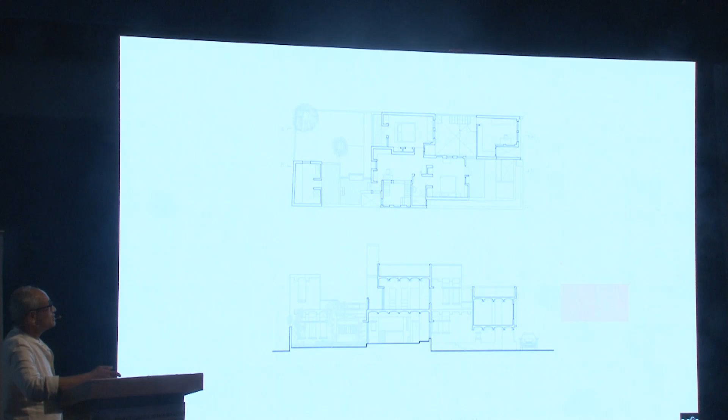The first house that we did was for my mother-in-law, which was on a 30 feet by 80 feet plot. So the garden is at the back. It was built in 1995. Fairly simple plan, you will see it has precast beam systems, precast panels, all that. It is something which has grown on us, and I think it has also become a kind of anchor point when I look back at work that I do, I feel that I lost my way in between.

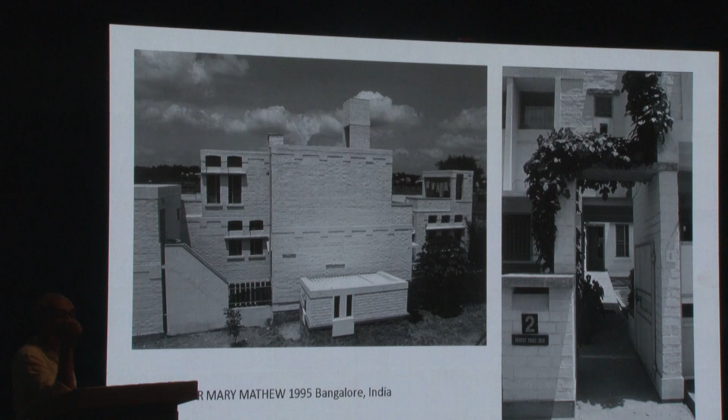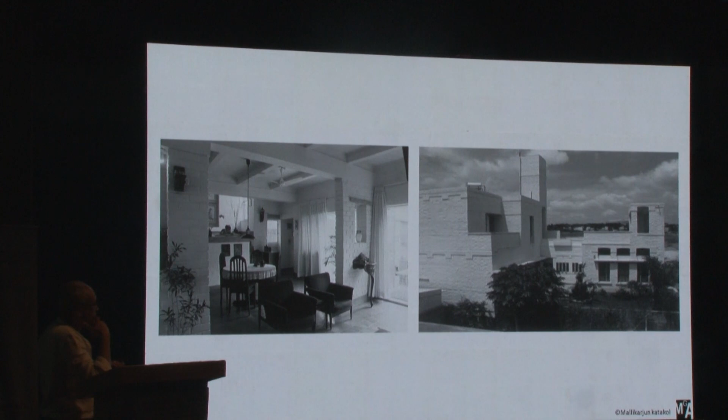There are projects where I think I had to turn back, and I realized that because there is something in some projects which is not just nostalgia. It is something deeper that is there. And that's the garden today where we normally dine. It's a little garden at the back. And that's all it is.

And makes a home. This is 2017, it's called the House of Stories. It belongs to a writer who, after an hour of meeting, says, I'm an architect from SPA Delhi and I want you to design my house. She could have said that when she entered the door. I was wondering, because the first thing she said was, I want a house of darkness.

So I said, I have lived in North India, so in my mind I said, Vichitra Prani, you know. I said, what a strange thing. And the first thing she handed over was Tadao Ando's book, I Love Concrete.

This, of course, Nisha has designed. I didn't clear this exam. We both made two independent schemes on the same idea of House of Darkness, and I think this was much closer. I'm glad I lost on that, but I got it done and finished.

It's about you entering somewhere where you don't know where you're actually headed, so there is a certain amount of uncertainty as you enter a door, and this is where architects also play the fool. The door is designed like a guillotine, literally cut in that shape, so when you open it, you feel it's going to chop your head off. But you don't tell the client such things — those gory stories and fun you keep to yourself.

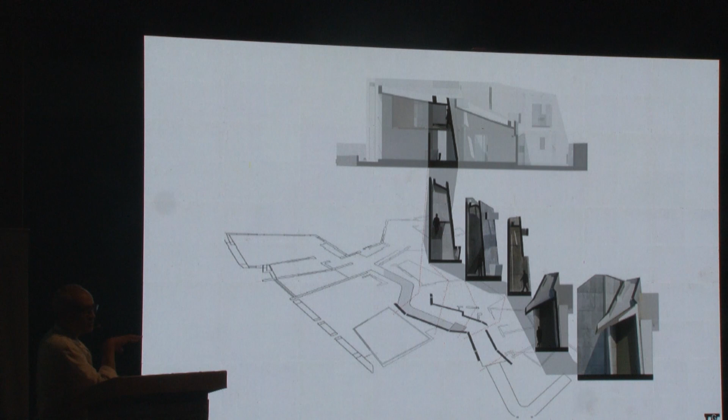So it's a bizarre plan, but that space never actually feels that way. You'd think you'll go crazy looking at it, or that it's a play of forms or volumes. No, it's not — it's got a very simple strategy.

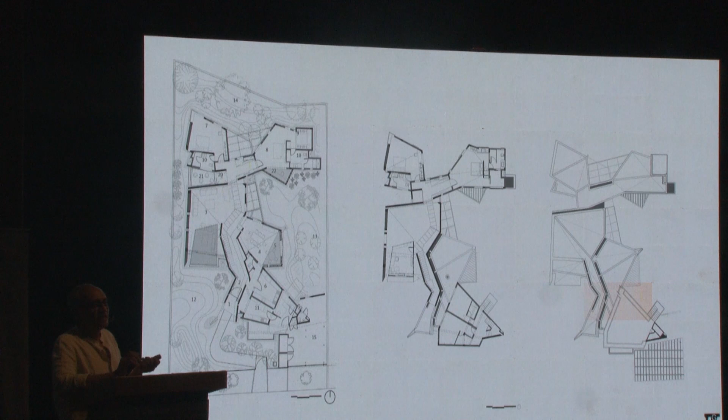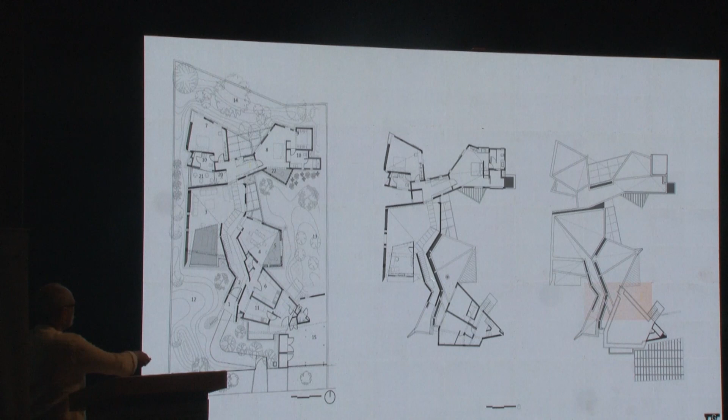It has three different gardens, and it's only looking at inflections as you move. You move through the center, which is the core — sorry, it's not very visible. That's the concrete, and there are skylights which happen, and that's what collects the water from the roof. The roof is not straight, everything is sloping. Most difficult house to execute.

But architects have been known to use the axe on their own foot.

This is one of the gardens which was used by her mother, so she would spend a lot of time here. On the left is the breakfast room, that's the pavilion kind of space. Nobody believes it when other people come into this space, because the house actually is like this — there's nothing more and nothing less than what you see.

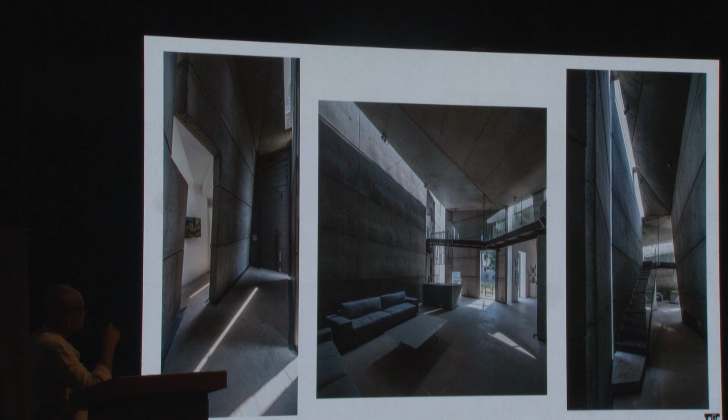That's the level of simplicity and the idea of luxury that they have. The luxury is about simplicity of material, it's about space, it's about shade, and how light transforms what happens on the wall — it literally gets animated, like Kuke was showing in his project. I often get pictures from them, and it's as frugal as maybe just a flower vase, otherwise there's nothing.

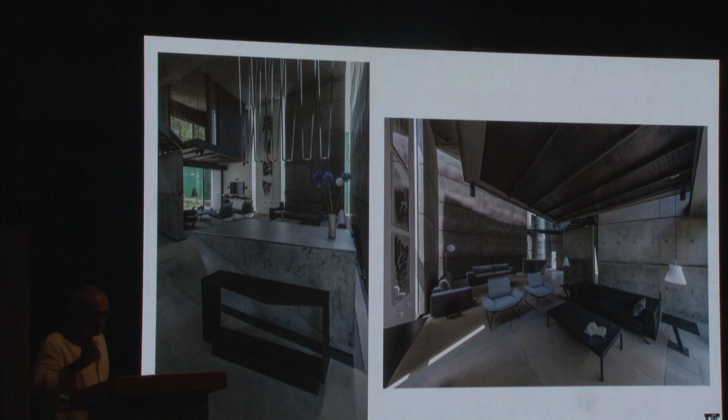Yeah, the most intensely detailed project that I've ever done. Everything, including the bench, the light which got the Elle Decor award, and the skirting — there's no end to this.

But this house breathes, and the concrete does two things. In the daytime, it becomes shelter. In the nighttime, it really feels like a dense cave because it absorbs all the light you're using — it doesn't pick light. And then you have these little log cabin kind of things.

It's literally just about light — that's the skylight on the left, these are the cutout skylights, and little things. I think these little things matter a lot.

That was for the granddaughter, because when she comes, she has a thing by the window. The lady became a writer, so she sits here and does her writing — she writes English fiction, so she has a view of the entire garden. That's her son's room, and that's the granddaughter's little space.

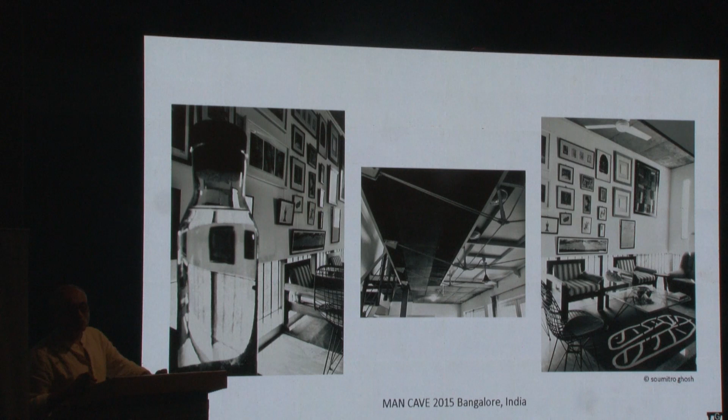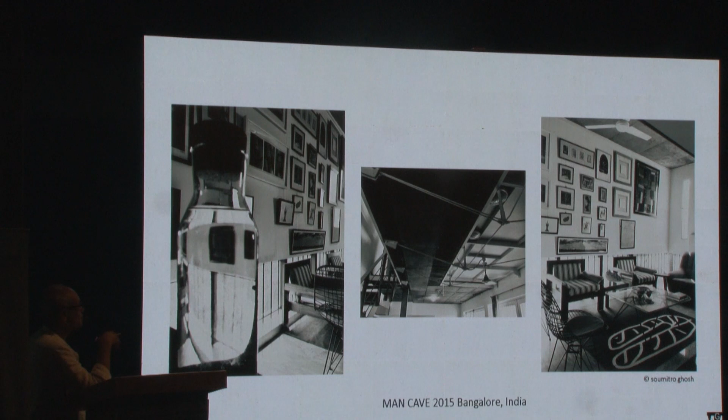That's my cave, actually — I closed off a bit of my home. This is below my office, so I closed this double height space and made a little plywood kind of thing. I discovered my home only during COVID, because otherwise I was in the studio till 9 or 10 o'clock. Once nobody was coming in, I wasn't even going to the studio, which was one floor up — I'd rather spend time here. It's just a place for books, that's all it is.

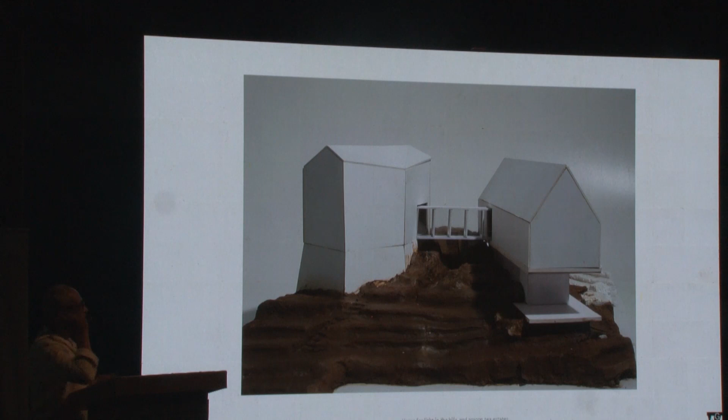So two blocks: living space, bedroom space, and a link, and a space in the heart of the house. So this is what it became.

It's only when I reflect back — and this is something I have also realized — that a lot of the decisions happen, but their real reason I myself only realize at a later point of time. Whether it be the plan, it's very much like what the villagers and even the British were doing in Coonoor. There's no difference.

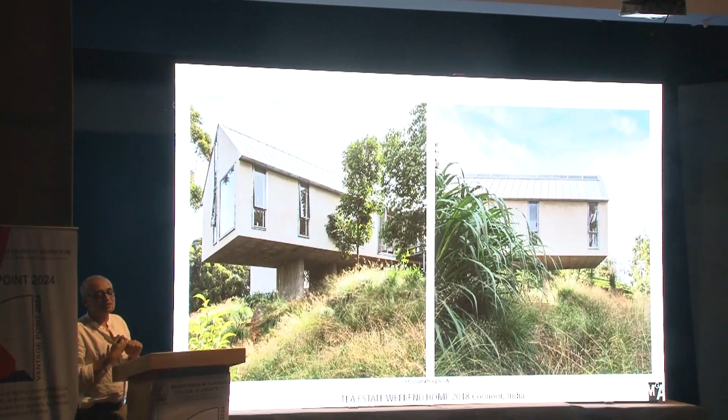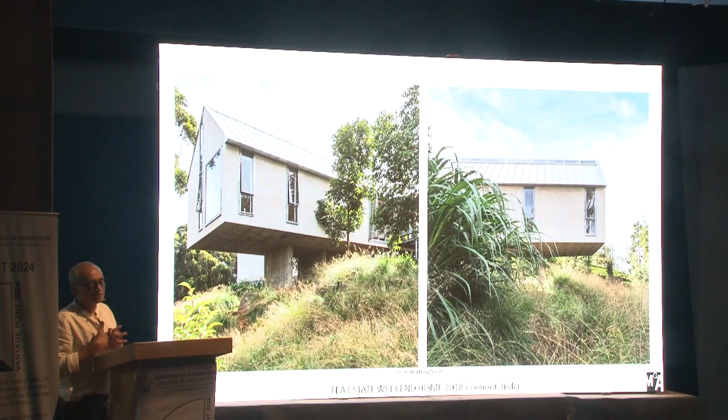So typologically it is similar. Then what does it do about the structure? It has shades of South American modernism, which is the stilts and the concrete. There is the lime plaster, which is for purposes of weather and for having buildings age gracefully, so that you never paint. Let it age.

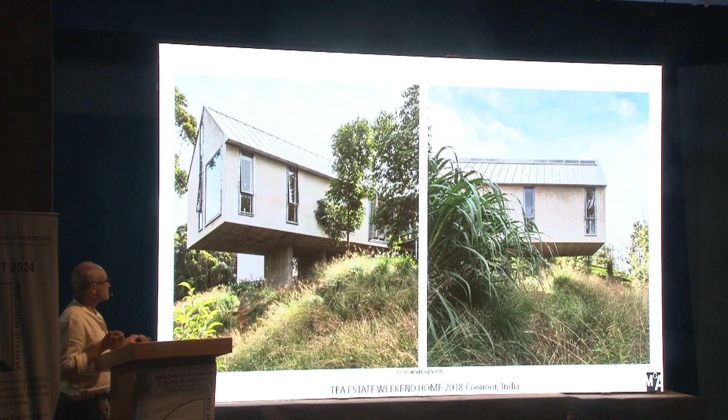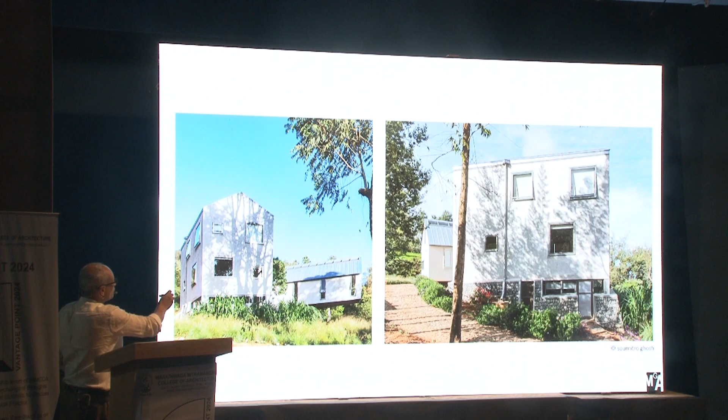And the roof, which is done by a French craftsman, it's all handmade. Why? Because it's very durable, and very precisely detailed, and you have the skylight. So I think it has so many shades of so many things that one is actually trying to find a balance. So you don't take a road in front of the house. The valley is on the right side. So what you do is the road sort of loops around and goes into the house from the back.

So that your view never sees a road. And that's where you arrive, and you can get onto a ramp and get into the living space, or you can go and park downstairs and then come up the spiral staircase. But the heart of the house is actually in the center, which is open towards the valley. On this side, that side is the valley, and that's the connection in glass, which is between the living and the bedroom spaces.

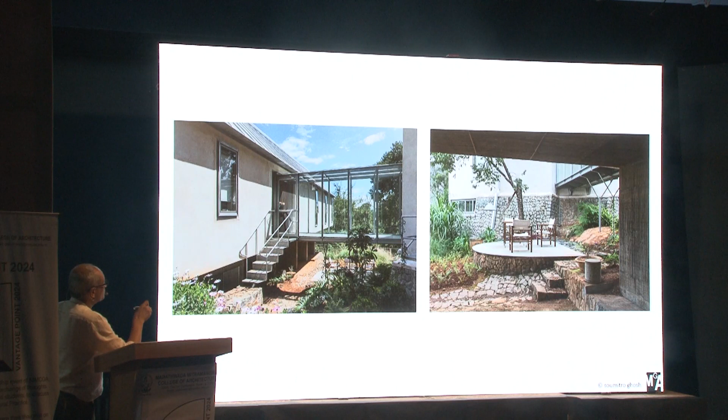I think yesterday some of us were talking about this idea of knowing when to stop. And I think this is something which I'm extremely conscious about, because our versatility and proficiency needs to be tamed. We need to be able to know when to do more, when to do less, and when to stop. And I think this is a very subjective thing.

So I enjoy that, the small things, whether it's about scale, about effort, a lot about. So that's just a hall, whether it's for an artist or for a writer or just for living, and you get this dramatic light, because it's fairly cool in Coonoor, and that's the little attic which I have reserved for myself, which is above the kitchen, so you get beautiful light there, and you see them because you're the closest to the moon from here, from the attic.

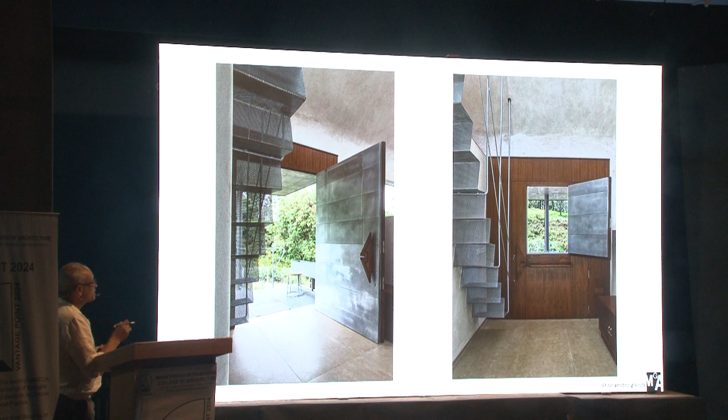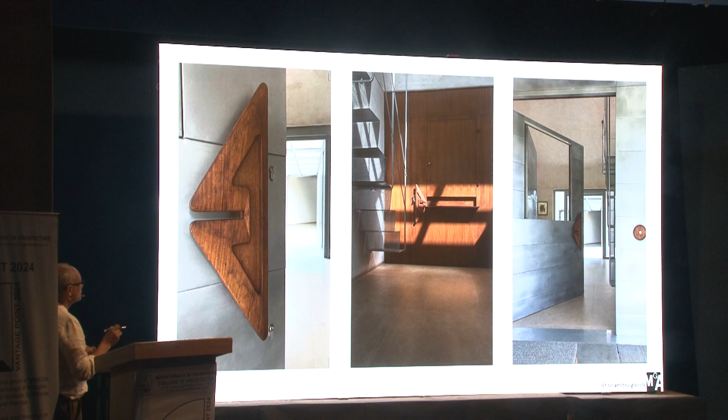It's all that has a European influence. This is derived from the bisons which are surrounding the site. That's the tea estate, and all the details. And there's a suspended staircase that opens up so that you can exchange things. That's a little bell. Very, very little things, and that's of course the glass top, and this is something.

The picture on the left is one of my favorites of this house, because there was very little time. This is one of the only projects which I've documented myself because I was short of time, so I had to do it before the rain. So these pictures I had taken, and the picture on the left.

I call it the object of desire, because when we have a view, I always assume that that building actually belongs to somebody else and is prettier than mine. And I think that conflict and that realization makes it very precious. So you think that is my house, that is somebody else's house, but when you go there, this looks better, because then that is somebody else's house. So I think this play is actually fairly well studied in Marcel Duchamp's early work.

He does this. And of course I have enjoyed doing lights, which is with metal and wood and things like that. The idea of sustainability, I hate this word.

But yeah, I've realized that we have worked with so many old buildings. I never ended up doing my master's. Didn't even try, actually, honestly. I thought I was good enough. It was enough to do, because I took 5 years in undergrad without failing, which was a miracle in itself. So I thought, yeah, we'll learn down the line.

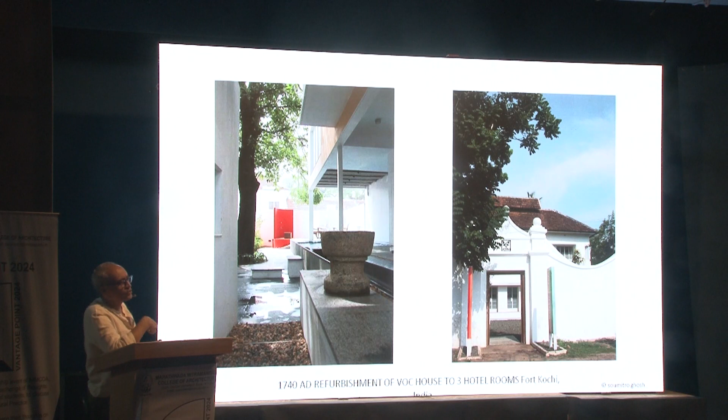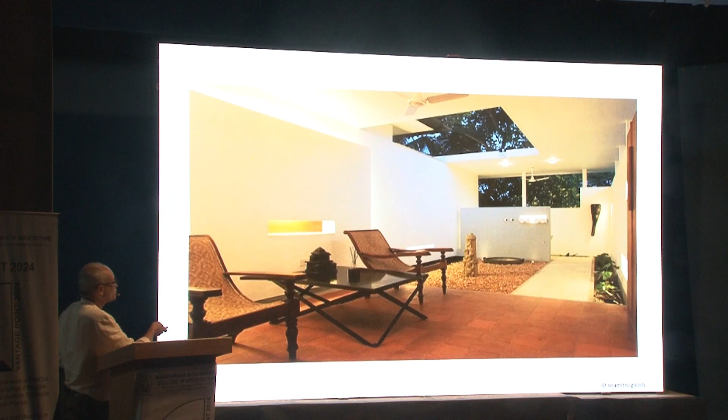So there's a 18th century house in Fort Kochi where we made just 3 rooms. It's in a heritage zone, so we did not transform the outside. So why I say it is sustainable, because the best thing that has happened is the most sustainable, and you hold on to it, and then you add to it, you save it, and you capitalize on it. So this is the first floor, just 3 rooms. Each room has a veranda, a toilet in the open, and it's all surrounded by trees, although it's in the center of the city.

And so in my view, architects, sometimes it is very disappointing, and you feel sad that architects are so vulnerable to what kind of jobs you get. I have no control on what I get.

And some good ones have slipped away, some were not so promising but turned out well. But yeah, all we tried was to do 99%, to do a good job.

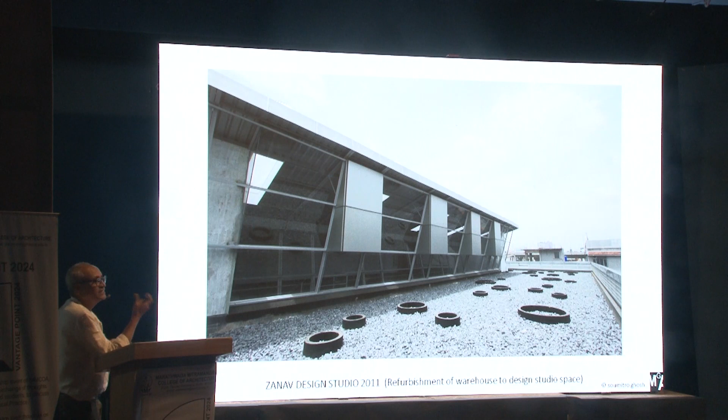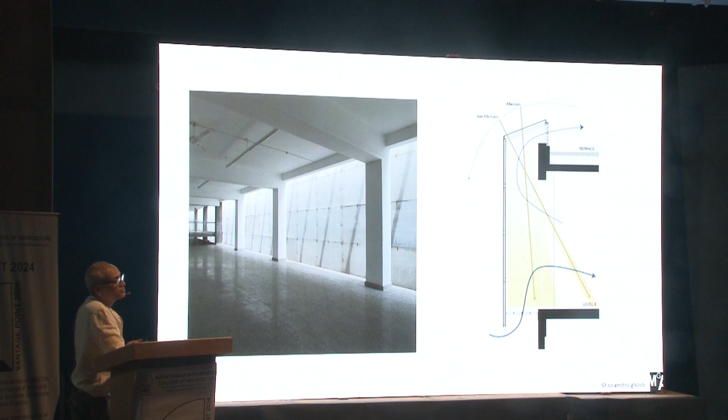This is a design studio. They design fabrics, so to have minimum distortion of light and color, that's why it's all gray.

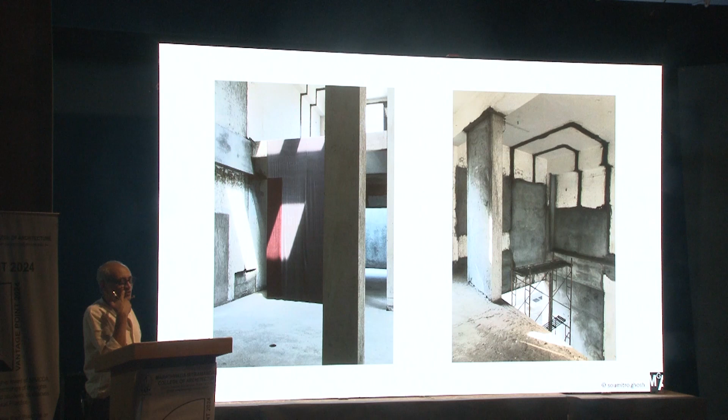Then the second building was to be done, and we removed all this. My friend and client were standing together, and he said, 'I think we will stop.' And I also said, 'Yeah, I think we should stop. We should not do anything.' We had removed this much. So we realized, I think there is a point where you realize you don't do something. So that project was shelved - it was only the demolition which happened, and this is how it is. It's used for some photographs, not for himself, but for his - that's Phantom Hand's furniture. It's just used like that.

We found an old school which was used as a school but started as an orphanage after the 1890s famine in the Mysore state. This was the condition of the building, and this was how we documented it.

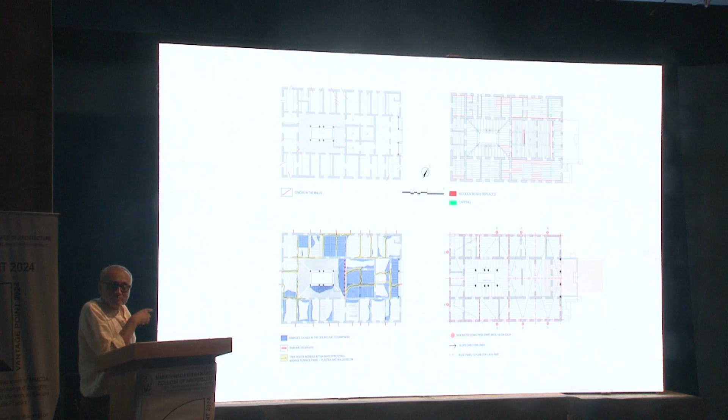Everything learned, I'm not a conservation expert, but just good common sense. This particular project I did single-handedly, 140 site visits over 7 months - you can calculate the average number of visits per week alone. And most of the things were done by hand.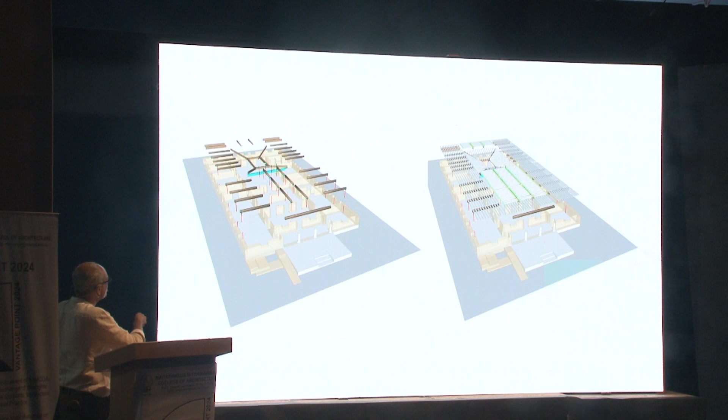These drawings were made afterwards, especially these two, where you add certain supports and reinforce certain places which are falling. You do cappings, which is green, and the red ones show the kind of condition of the place. The drawings were these - these are GFC. And it's executed.

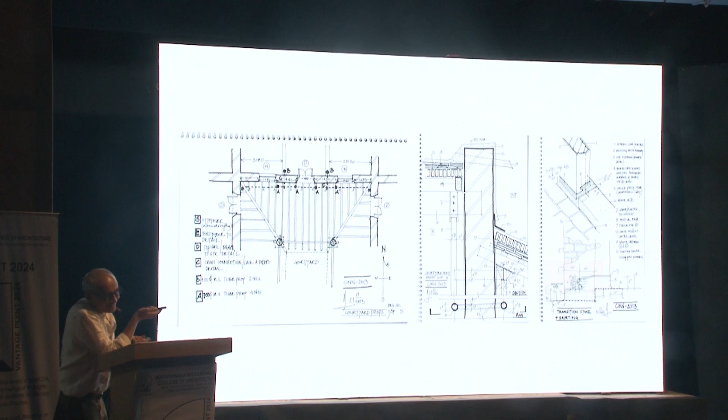And this is what it has become. We try to be as discreet as possible, keeping the original character, literally. And this is something I have learned about: certain buildings need to speak out, and certain buildings need to literally make people feel that the architect was never there.

So we just did a little skirting. We relayed the whole floor with the same stone - this is all relayed, same stone as before. Changed some beams and things like that, rectified cracks, made some transitions. So this is the transformation - it gets a new lease of life.

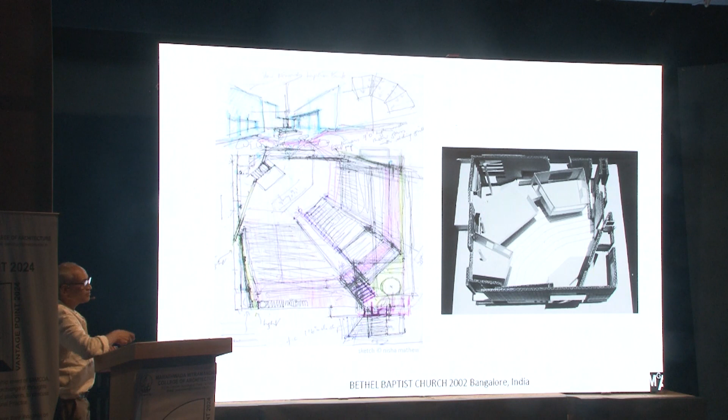Certain institutions - in 2002 we did a little church. The unique thing was it has a very traditional plan, a simple amphitheater kind of plan with central focus. This is a Baptist church, so it didn't have any symbols - there was no cross, nothing else.

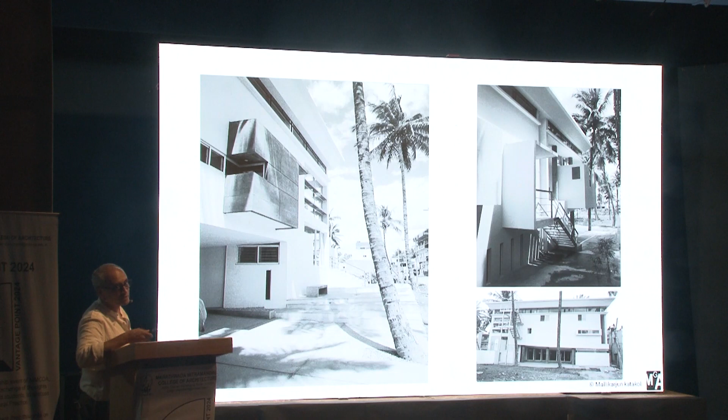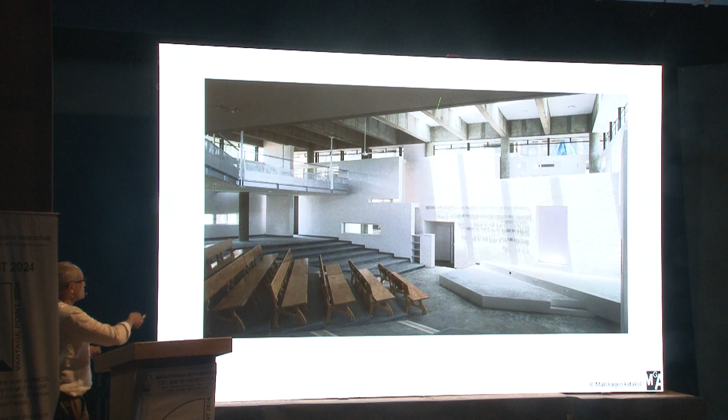So for them, it is not a religious space - it's actually a congregation space for fellowship, where you get the sense that you feel good about praying there, but it is not a religious space. So the only thing which appears is some text from the Bible, because it was all uncertain as to what will happen around the building. It actually closes itself off, but it does one important move - it makes a slice in the roof. So the light comes straight in by the time they finish the service, and it gets a focus on this.

So although light has played a pretty important role in our work, this is a story of one of my important clients who discovered me in maybe 98 or 99.

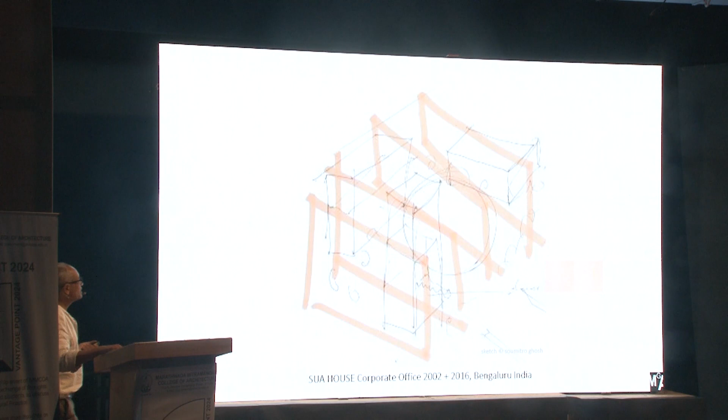One day I got a call and he said, 'I want to meet,' and then I met him, and he said a strange thing. He showed me the site and said, 'I'm not going to tell you what you have to do. You have to tell me what you want to do with this site.' There was one jackfruit tree in front, but then he said the scary thing: his first architect was Geoffrey Bawa, the second one was Rahul Mehrotra. So, and I was young.

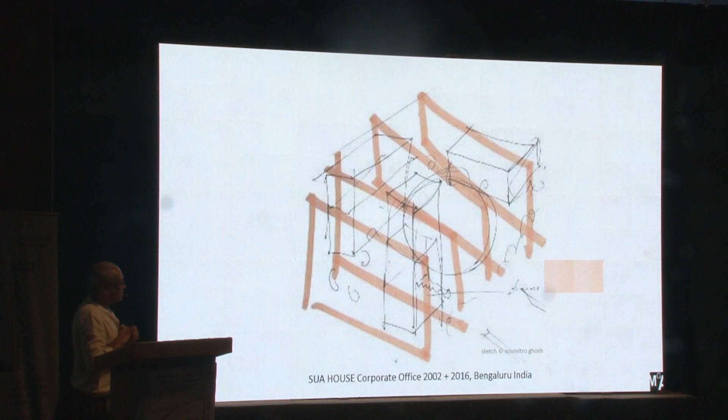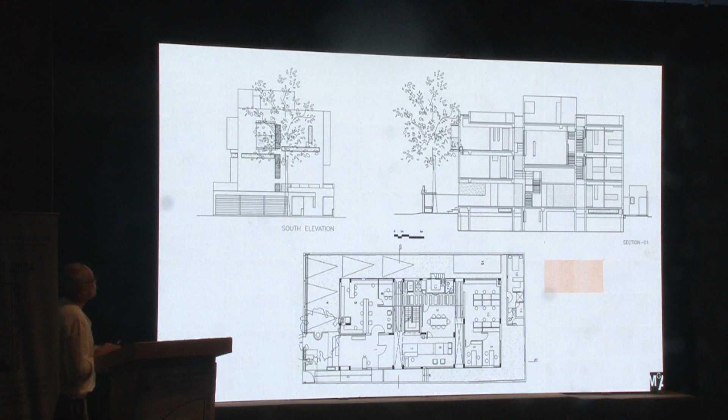I was anxious. So we worked with the idea of 3 buildings which are close to each other, which just works with 2 slices of light. That's all it does. It's a very simple building, but one of the most rich experiences even today.

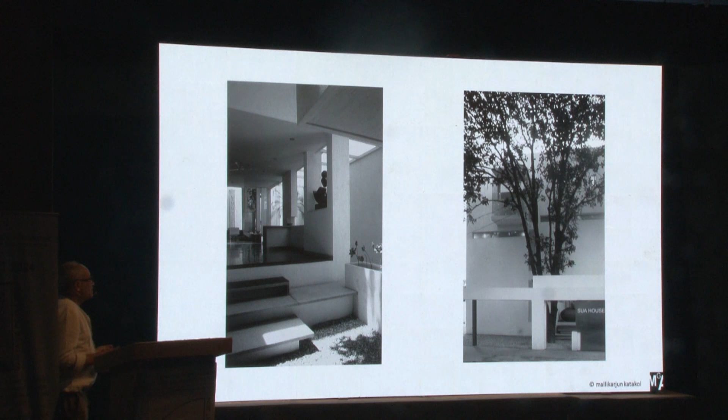That's the slice of light. It's only 1.2 meters wide, takes the light right down to the basement from here. You literally don't need any light during the day, and they normally work till 5:36. Central areas are just transparent, with a 1.5 floor height and a single floor height. That's about it. There's constant views from everywhere.

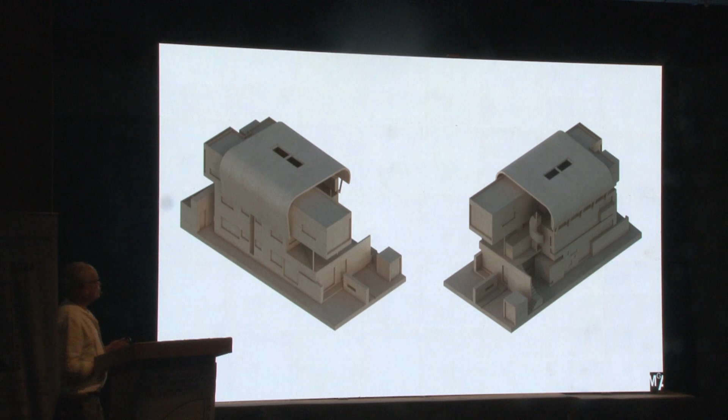And we added a floor, where the roof actually became like a tent. It's like putting a room on the roof, which feels very light and gives the impression of being almost fabric-like. That's of course our studio, the studio on top. That's 2004.

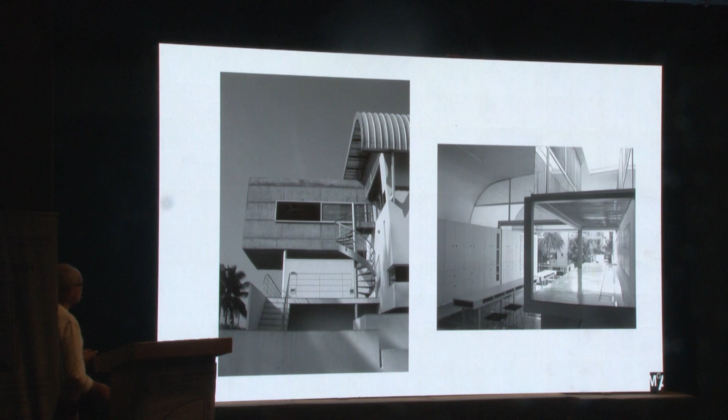Now there are a lot of buildings around. These are older pictures. Again, the light comes in, it goes down to the ground floor, so it travels 4 floors down. That's what you saw earlier.

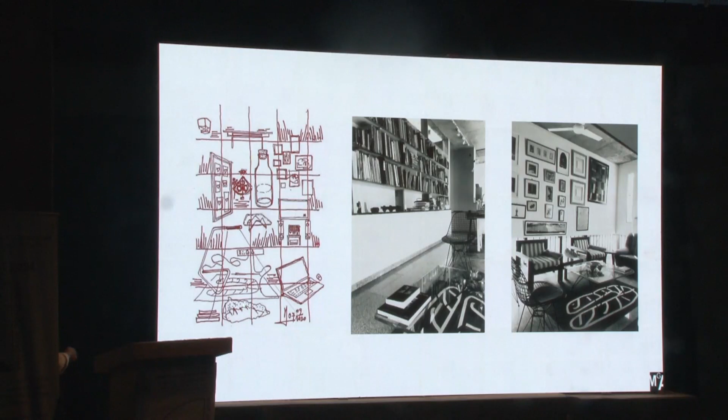That was my impression of my room in COVID times, because that was what life was. There was a water bottle, there was a light, and we've done a couple of public projects.

This was a competition, the Freedom Park, about 22 acres of old jail. So we were looking at an overlay of how does one overlay a present path over an older typology and an older memory. That's what we were trying to work with.

It is about certain clearing up of certain areas, additions, and various things. So what was the guarded portion around the tower becomes actually the public space. And you change the movement.

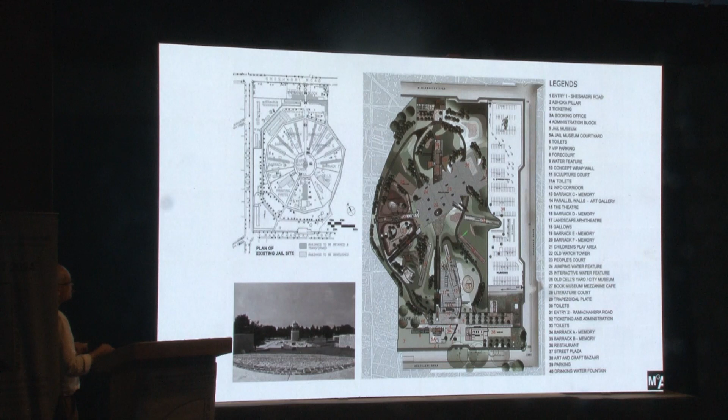So you keep discovering the old pattern and elements in parts, and you're reminded of it, and yet it becomes a public space which they start enjoying. There's a lot, it's allowed to have public meetings there.

This was one of our important competition projects. We've done lots of competitions. I'm not showing most of them today because it's too short.

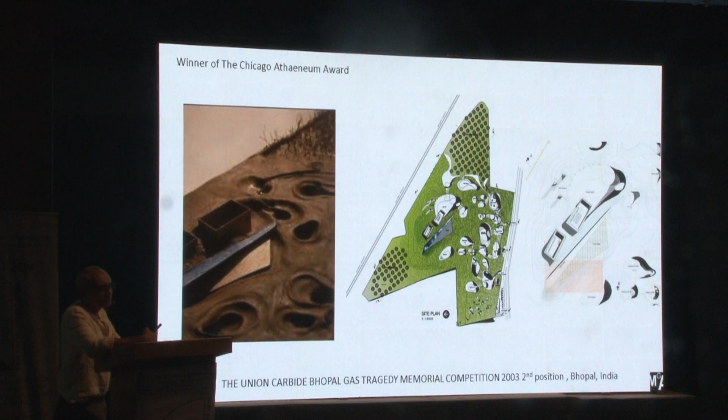We came second, and we knew that this project could never win because the strategy was based on cleaning a brownfield, since it was contaminated earth. So the strategy of cleaning becomes the landscape strategy, and it also becomes the strategy for healing, and that becomes the language of the project.

It's about water, it's about movement within the spaces. So it's a kind of a very poetic take on this. And we knew that we'll never win, and we went all out.

But it was wonderful. Actually, the day we were sending it off, I think the next morning, Doshi came to the studio, and he started talking about the project, and we said, God, now we have to start again. It was the last day. We had to submit the next morning.

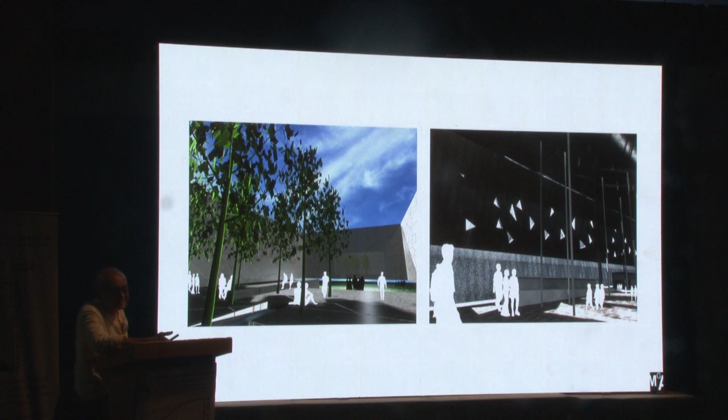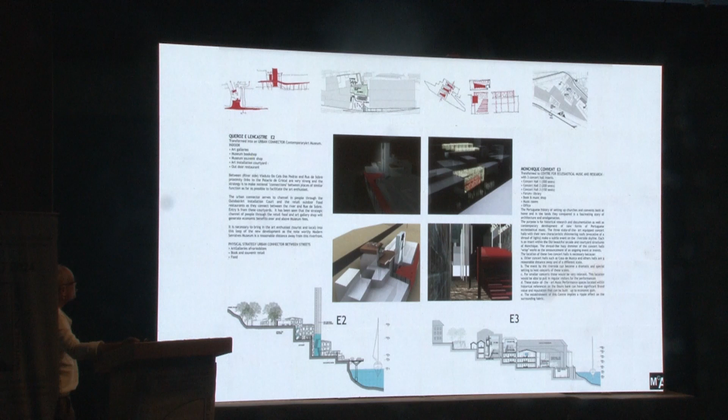So this was, I think I was telling about the Porto project. This was 3.5 kilometers of stretch along the Douro River, and there were 9 building sites, but we enjoyed it.

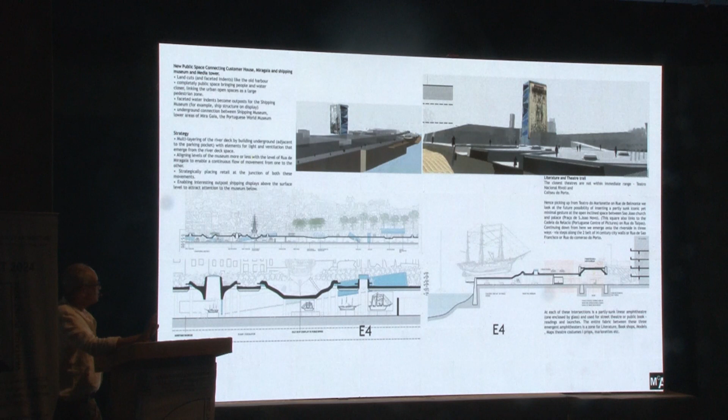I think we had a wonderful team from Pune actually, who were interns. 2 months we worked, the whole office, 24/7. I think we learned a hell of a lot. Everybody, we enjoyed ourselves. We came fourth, but that's okay. But we really enjoyed it.

This project is yet to be opened. It's 8 years since we finished the building. It's an underground building, a Martyrs Memorial. It's yet to be open to the public. So yeah, that's the memorial.

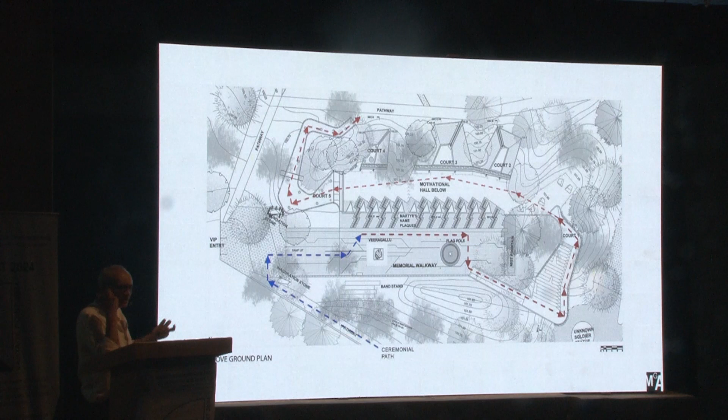It is again based on the idea of a ritual route, like what you have. It's very common, especially in South India, especially in Kerala, that you will find the ritual route is not only a part of Hindu practice, but also in old churches. It's very similar. They also go around the church and things like that.

So you go in, and then you go 6 meters below the ground, and the trees are there. So this plan is informed by the roots of the trees. So there's a straight line. That's the hall.

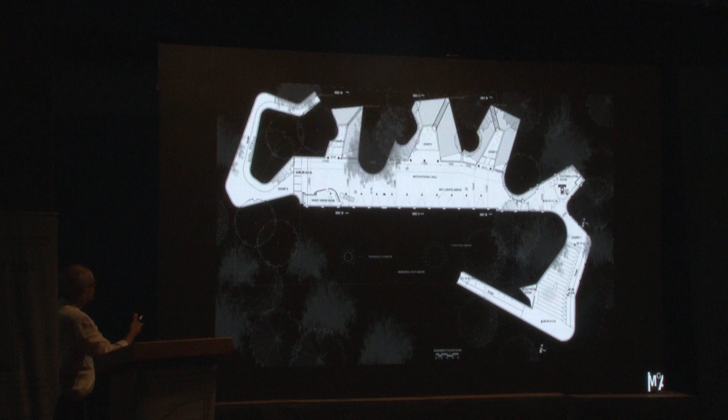So you are actually slipping down into the ground by 6 meters. Here you're moving between the 2 trees, and you come in and you look. It's absolutely gorgeous when you look at the tree from 6 meters below. This is of course older pictures, but it's all covered by green now. That's the underground courtyards.

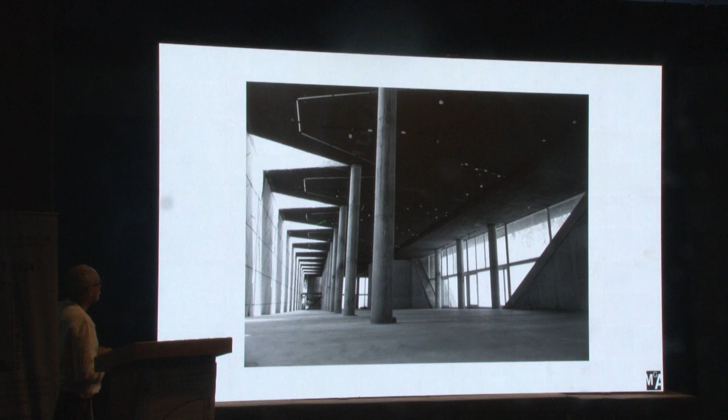And that's the names which take precedence on top, and that's the hall—the local tradition of venerating a stone in remembrance of people who have laid down their lives for the kingdom. This is one piece for all people in India, from all three armed forces, since 1947. That's the hall, and yeah, it's still unoccupied and not used.

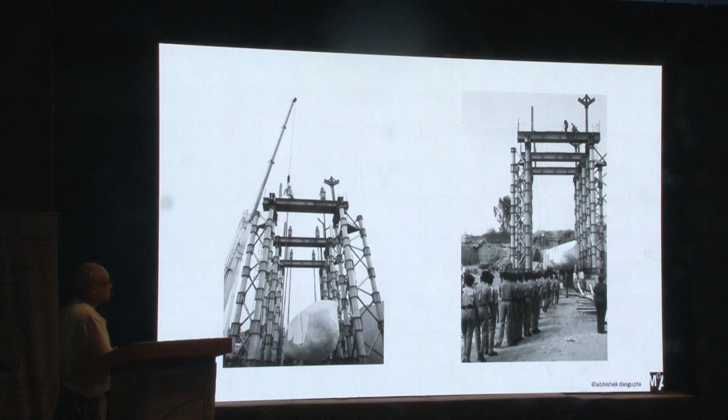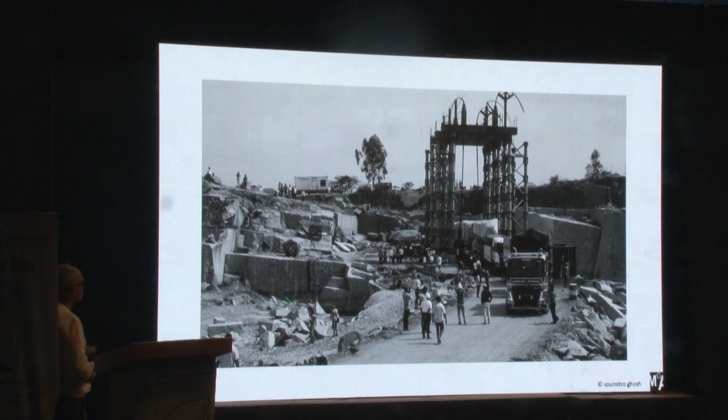This interesting challenge was to make this 450-ton single piece of stone, and the shifting of it. We have wonderful documentation of this, which you will see one day. This is where we were discussing certain things, and this is when the stone is being pulled out by 4 trucks in tandem—it had to go out of the quarry before the monsoon starts, otherwise the trucks will slip.

So that's when it's being taken out—240 wheels on this truck, and they're moving here. That's the giant frames which were holding up the stone, and that's the cables holding it up. That's the truck, and that's the truck in movement. You can count the 4 trucks and the carriage, and the kind of intrigue that it caused.

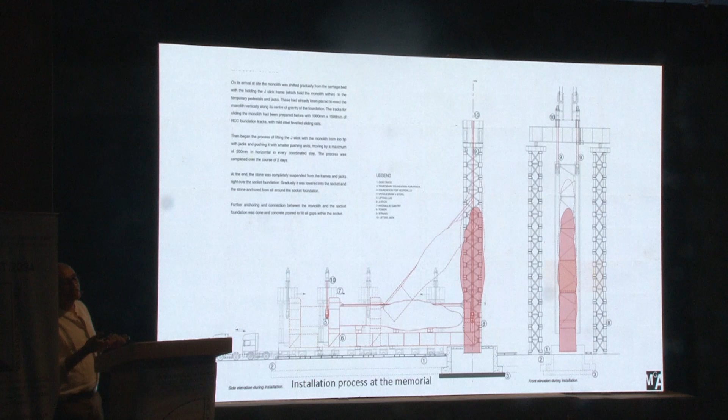It was coming from beyond the airport, near the hills, into the city, and then it starts moving through the city. It cannot be taken through flyovers because they'll collapse, so they had to find a special route—they traveled 40 kilometers in 2 months.

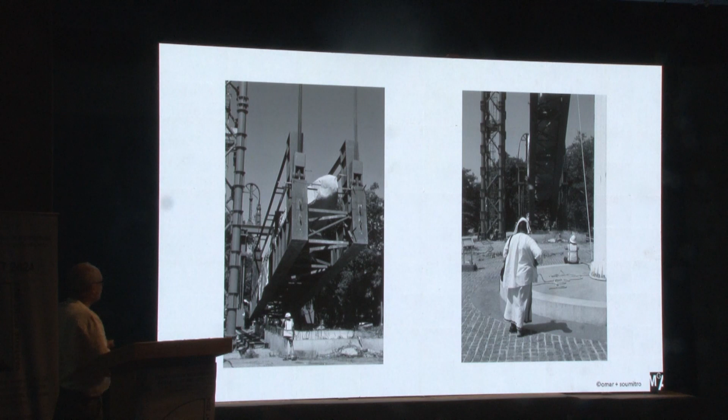And that's how they lift—they push and they lift, and then they drop it into a socket. That's the process of lifting, 200 mm at a time. And that's what it looks like today.

And that's the bandstand. Reflecting back on this, it almost looks to me like the plinth of a temple, so that it never takes precedence. That's the place, and yeah, it's yet to be opened.

Bangalore has 60% skilled migrants, an extremely young population. So when they are single, they drink. When they're dating, they drink. When they have broken up, they drink. Otherwise, they drink.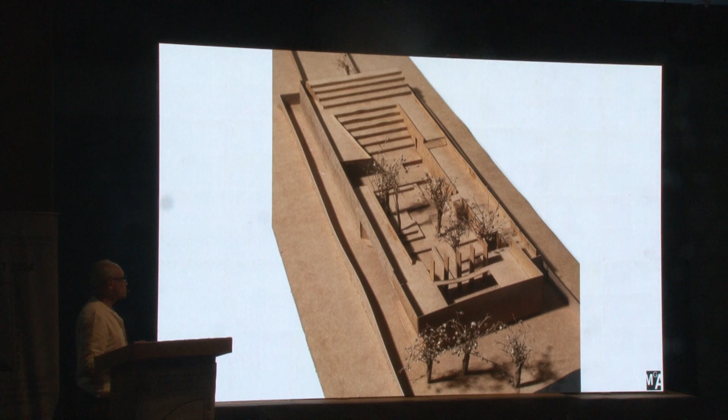Jokes apart, hospitality is a very large part of the economy. But I have found that they're extremely responsible—nobody is going anywhere just to get drunk. Seriously, they are very sane. This was the largest microbrewery in Asia in 2018. Now there are 2 bigger than this.

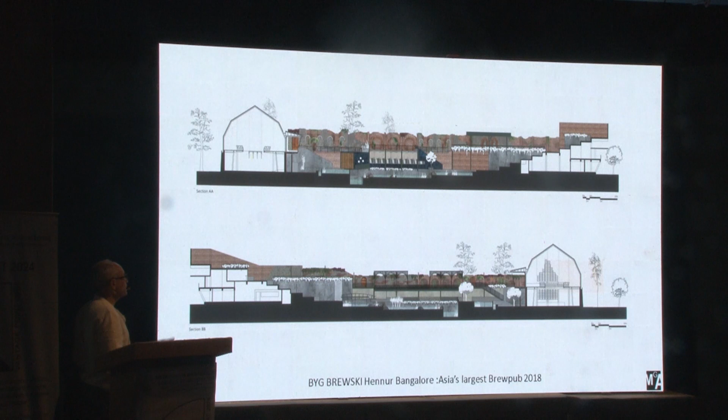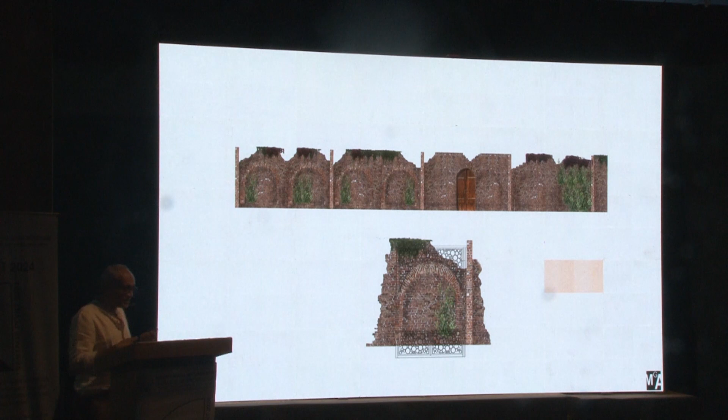This was designed as a ruinscape—it has a central space and just a slim building all around, and a hall for events. I won't get into the detailed story, but this idea of a ruinscape made it easy for everybody to get absorbed in this.

It's a 1,500-seater, covering 65,000 square feet, and this is where people eat—otherwise they remove everything. There are events, they have their own beer, and on FIFA World Cup night there were 4,500 people inside. I was there in 2018, 2 months after they opened, and you can't believe the kind of numbers it does.

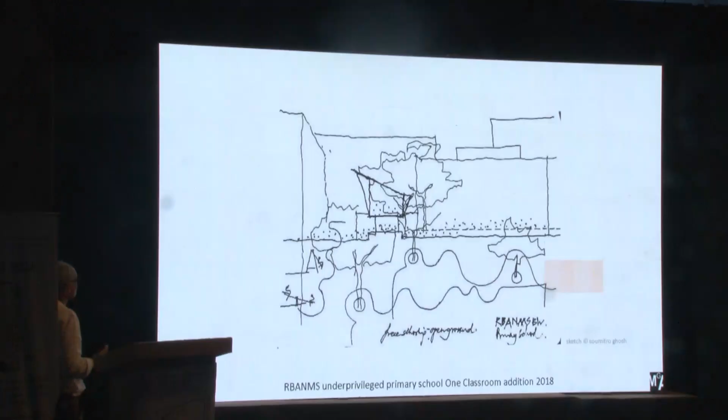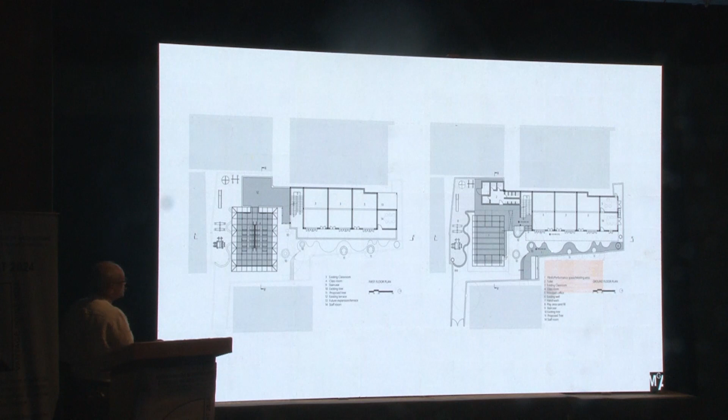This is one of our smallest projects—a single classroom. I love to do it because I thought there was a huge scope. We only added 1 classroom, and that's the end of the story. All we added was 1 classroom between the trees and the plinth. Nothing else—a very, very ordinary structure in metal, but that's what it has become.

This was finished in 2023—the Museum of Art and Photography—done with public funding, also let's say private funding. The structure is concrete below and steel above; from the ground floor onwards it becomes steel. Those are the public spaces, and it's an extremely dense building because, in my opinion, at less than 50,000 square feet, it's like a postage stamp size of a museum by world standards.

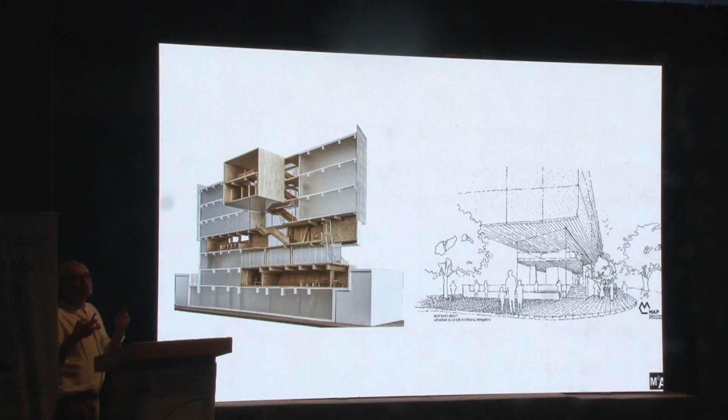Normally they are running into 10 lakh square feet onwards, but it's center of city. I think it is making a huge difference because they are curating wonderful shows and constantly changing, so it's beginning to become a destination for people.

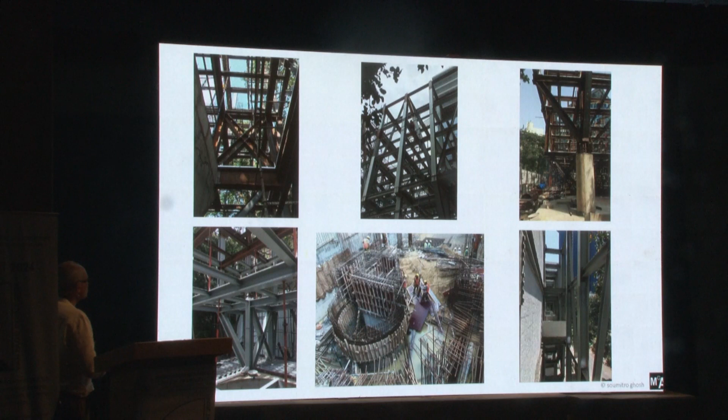This is during the process of making, where you're trying to use everything—where you turn the car, you make your tanks, and whatever is left over of the setback, you again make tanks. It has a stainless steel cladding.

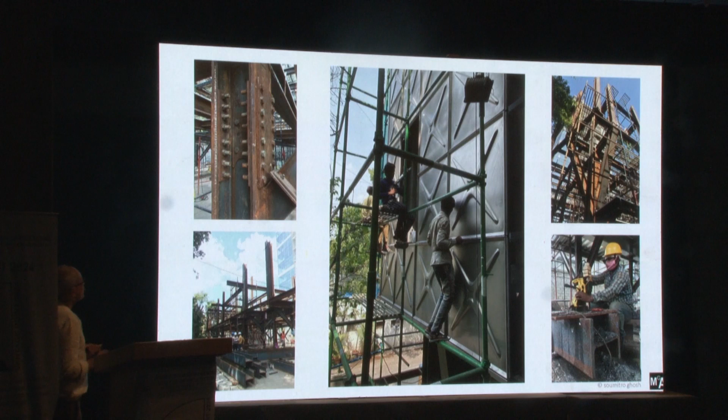Again, I come back to the idea of ordinariness—while it has to attract attention from the outside as an object, it's also a part of the city. Now it's always something to think about whether a building should be an icon or should it just merge with the city.

And this is where I was dealing with two conditions. One is that it should be easily recognizable that this is a museum of a certain kind. So our metaphor was the idea of something like a water tank, the old British water tanks which had a skin like this.

It was a container, about something precious inside, which is pushing outwards. I was trying to use that as a metaphor for art itself, which is trying to make a difference. And this, of course, is stainless steel.

But the details—the only thing that is modified a little bit is the little curve, and all the bolts are still seen in the building. That bird is not Photoshop, it is actually real. It so happened.

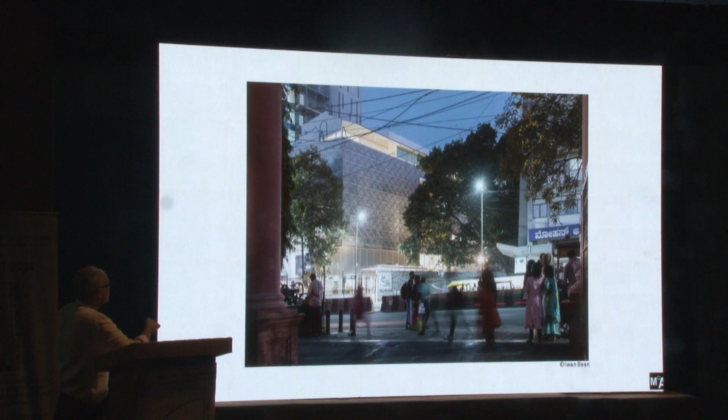So that's the view from across. I think this is last year's pictures.

Because the building is so tight on space and height, you don't take the feed and main ducts inside, but you put them outside. So it was not about trying to look like the Pompidou Center, but it was literally not possible—there was no space inside.

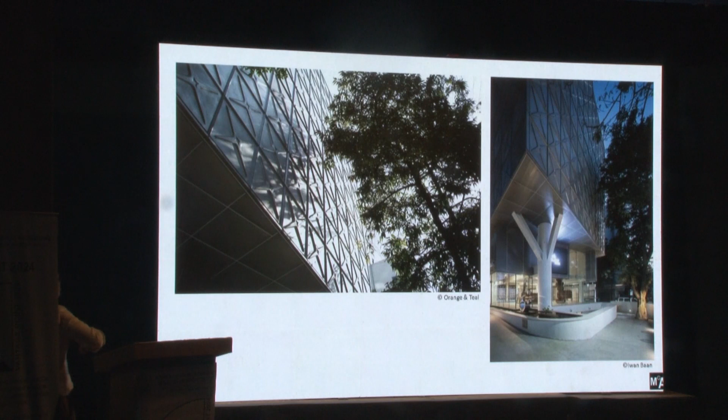That's the sculpture courtyard on the side. There's a sunken courtyard where there's a cafe. That's the side sculpture courtyard. That's when Stephen Cox had come to do his Mahabalipuram series in granite, which he showed. This is from the opening day.

That's the courtyard below. Now, of course, it's all green and all that, with handmade benches.

So the curation is done by specialists—they get people from outside and sometimes from their own team. This is from the permanent collection of more than 60,000 pieces that they have.

So the idea being that you should want to visit it and get to see something different. And this is one of the most inventive in terms of interactive technologies. So if you do happen to go to Bangalore, do see how those technologies work, because I think they're very interesting and engaging.

That's, of course, the reception area with Arik Levy's sculpture, and that's the library. And yeah, you see this has gotten painted and is just kept like that.

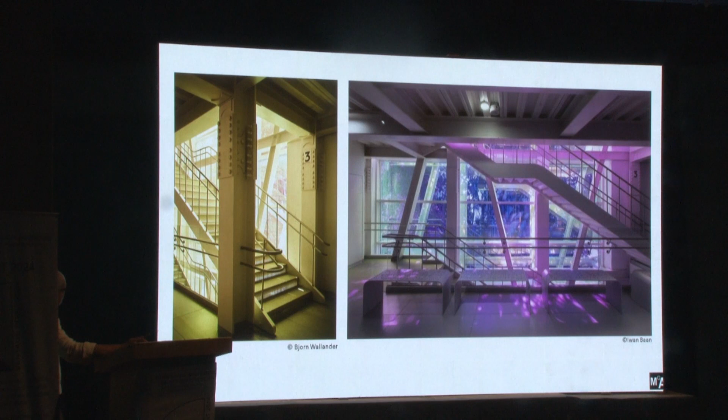That's again, of course, the idea of graffiti and the art. Yeah, that's the entrance space.

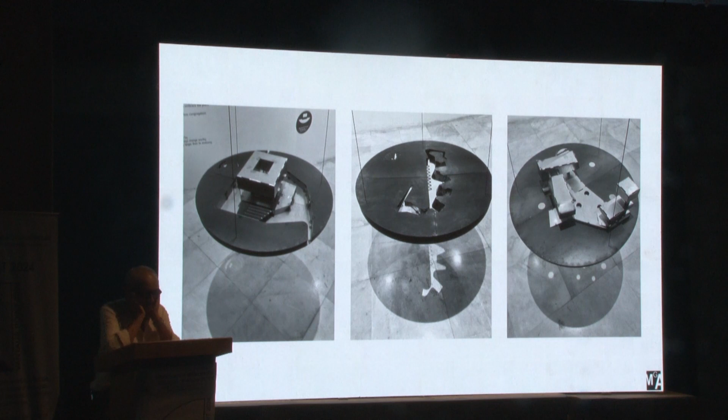I think that's pretty much—those are some steel models we had done. So I will end by just talking about, when I said that the topic was about architecture between the times.

What I really wanted to show through these is that what we do in the present, I see as a practice in the threshold—aware of a past, trying to interpret the present, but also trying to aspire for a future. What it is doing is trying to assimilate all that and balance it.

And this is where what gets highlighted, what gets underplayed, how it is done—assuming one has the ability, or goes through the process of understanding how to do it. But I think the first awareness for any architectural work would be the awareness of where it is seeing itself to be. And this will sometimes require you to pump up your ego and make a statement.

It will also sometimes ask you to underplay everything. And it has to communicate—I think that's the bottom line, especially for public spaces and even individual spaces for that matter. Because if they don't, they will never connect. And I think that is where I strive at the moment to be. Thank you.